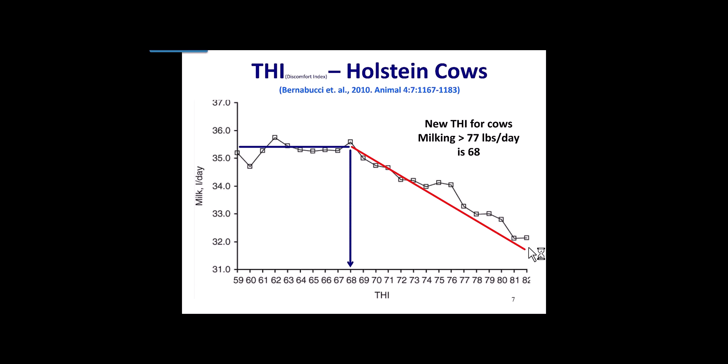And again, this chart, which compares the human THI to cattle THI, the important part here is the cow is much more sensitive to the heat than we are, and we feel it at about 80 degrees Fahrenheit, 40% relative humidity. If we wait for a cow to hit that point, she's already in a moderate heat stress condition, and that means her respiratory rate is above 75, and she's probably lost the equivalent of about 6 pounds of milk. Rectal temperature has gone up.

And so I think charts like this are handy for the purpose of client education to reinforce the importance of the different thresholds and what the parameters are by which we can quantify whether cows are in heat stress, and if they are, to what degree.

So here's a comparison of heat mitigation using a combination of either water and fans or neither. And the first line, the red line, shows that we have no treatments taking place there. If we add fans, and just fans, to that, we see we get a slight reduction over time of the respiratory rate as a surrogate for the heat stress. Again, that's over 90 breaths per minute.

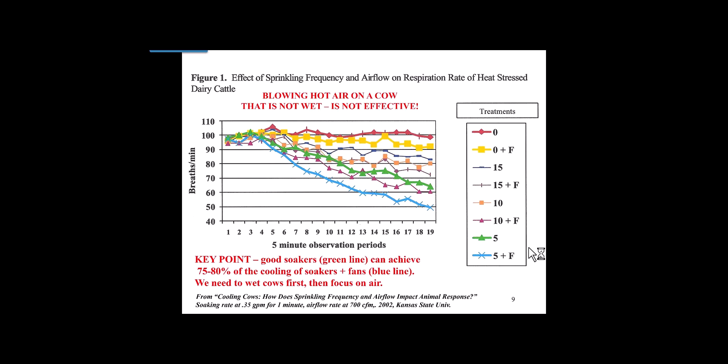And just to review, we know that the cow cools by conduction, convection, and radiation of heat, and those are all based upon gradient. It means she's in contact with solid or fluid surfaces that are cooler than she is, and so the heat moves away from her into those surroundings around her. And then we have evaporation, which initially takes place in her lungs, and again, that's an active process that requires the movement of air across a moist surface, taking the heat away from her to activate the molecules in the water and cause them to evaporate.

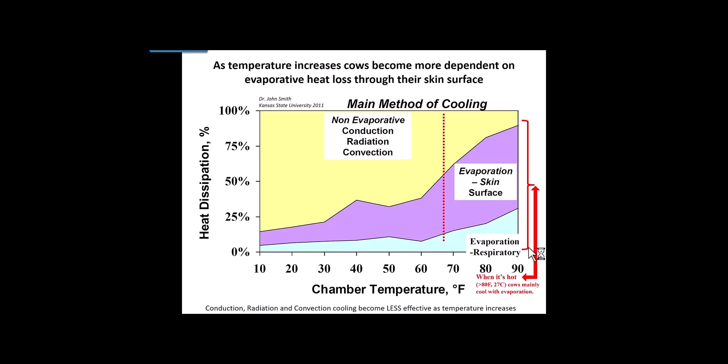So when we look at the impact of those different methods of cooling, as her temperature increases, she becomes more dependent upon evaporation from the skin surface. If we look, respiratory evaporation can account for maybe 25% of heat dissipation under the most extreme conditions. And at the same time, heat dissipation from conduction, radiation, and convection is only about 10 or 15% at those extremes. So that's where evaporation from the skin can be a very critical part of cooling under these extremes, and why it is critical to consider that type of technology to mitigate the heat stress.

So the point, I think, of Jeff's slides, which I'm going to start now, are if you're going to spend money on cow cooling, get it right. There are a lot of ways of spending money for cooling and have a very ineffective outcome. And what Jeff is going to share in these slides that he's generously let me borrow are the systems that are working on real-time dairies in California.

So it starts off with this little spray nozzle. It's called a TFVP 7.5. That doesn't matter as much as the fact that this is what delivers the water to the cow across her back, and this is the dispensing unit that we're going to be looking at to make sure that we get effective coverage on the cow. This green tip nozzle requires a certain flow rate, and if that flow rate is not available, Jeff has alternatives that can be used under different conditions of pressure and flow rate, and I'll show you those.

So again, this is the dairy soaker nozzle that he references, and there's a supplier for those interested. Again, we have no stake in this product. It's just so you know what equipment works.

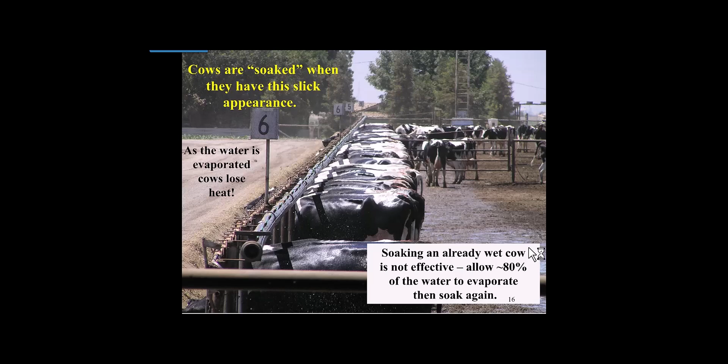Okay, so we want the cow to evaporate 80% of the water that's soaked on there before we start re-soaking her again. That is the optimum for getting the most amount of cooling for the application of the water. So here's a good photo showing you the large droplets in an effective system and the way it arcs across what would be the cow's back.

So you can see in these white cows where the water is soaked through, you can see the pink hide. This is terrific coverage, minimal coverage on the udder because we're not trying to wet the udder. We know the risks associated with that and mastitis. And again, we should be able to effect this type of soaking in about 20 seconds with an effective delivery system.

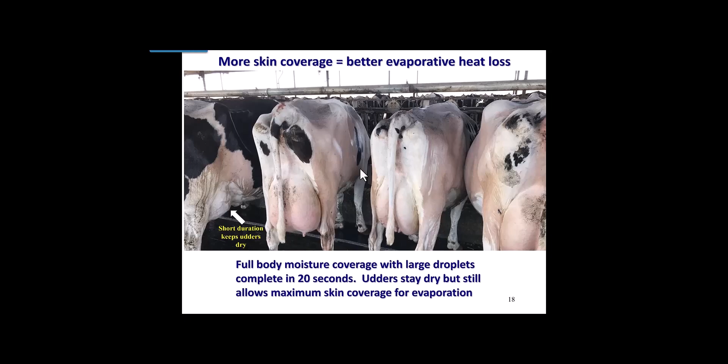Now, here's a less than optimum situation. These girls are getting soaked adequately in the front half, but about 40% of the surface is not getting covered, soaked with water. And that's because the angle of these spray nozzles is set too far down and needs to be brought up to reach across their back. So again, it's not that they're not getting cooled, they're just not getting cooled as effectively and more water is probably going on the ground as a result, which is doing nothing for evaporative cooling.

This is an interesting comparison. If you notice, the soakers that I'm pointing out with the cursor here are only hitting the front end of the cows. At this point, they raised these soakers to reach further across the backs of the cows, and you can see here they're getting full soaking. So this is a system that was undergoing adjustment, okay? So they changed the nozzle angle in order to get full coverage.

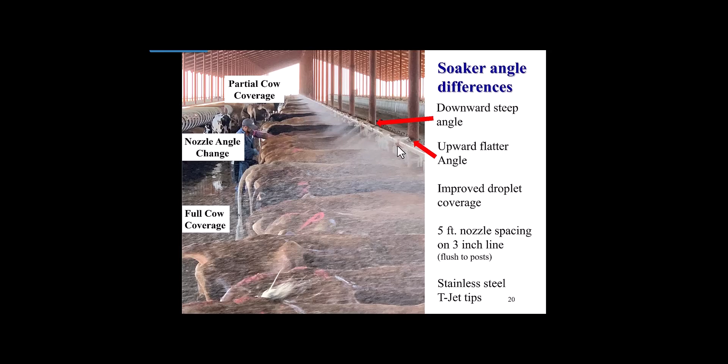And for those techies, these nozzles are spaced about 5 feet apart, and this is on a 3-inch line with those green tip nozzles delivering the spray. Okay, so here's an example again of effective coverage and allowing evaporation to take place before resoaking. Here's the Jerseys that are getting soaked up front, but not past the lumbar region, so we're missing out on an opportunity.

And here's one where, again, those of you who have experienced this know that one of the risks of soaking is to get the feed wet when you get cross breezes and drift of water, and then you get secondary fermentation and spoilage. So this dairy tried to have an inset of the line. They moved it off the neck rail, or the headlock rail, and further back, but by doing so, they basically missed the front end of the cow, and they actually pushed more water past the end of the cow. They overshot. So they understood the concept, just that it needs some refinement. Like this needs to be brought up closer here.

Okay. Given the fact that water is precious in most areas, and we don't want to have any more manure water to deal with than we have to, there are different technologies available now that provide sensors so that the soakers only go on when there are cows there to receive it. And so in this picture, this holding area, you can see that all of these spray nozzles are working. And as the cows in the holding area move forward, they shut off the ones further back, and just the ones where the cows are on.

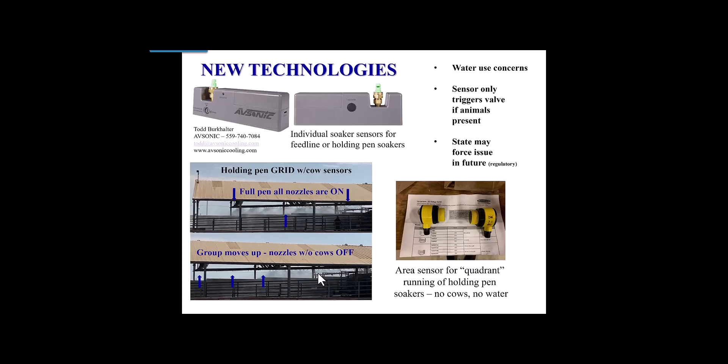So here's an interesting picture. This is a 2-inch line, so it's an undersized line, because if it runs more than 500 feet, 150 meters, it can't hold up for the amount of spray that we want. And you can see between the nozzles there are voids here. Okay, so cows would be missing out on coverage. So this line is undersized for the run. It can't hold up the pressure for that distance at that 2-inch size, 5 centimeters.

The other thing that this is depicting is side-mounted fans, which we now install over the beds, but also to get an angulation onto the cows to get evaporation while they're standing at the headlock. The other thing to notice here is the beds stay dry. We're not doing anything to soak the beds. We're keeping the water in the alley where the cows are and hopefully on their backs. But we definitely need to fix this, either the size of the line, to get more coverage with the current spray nozzles that are on there.

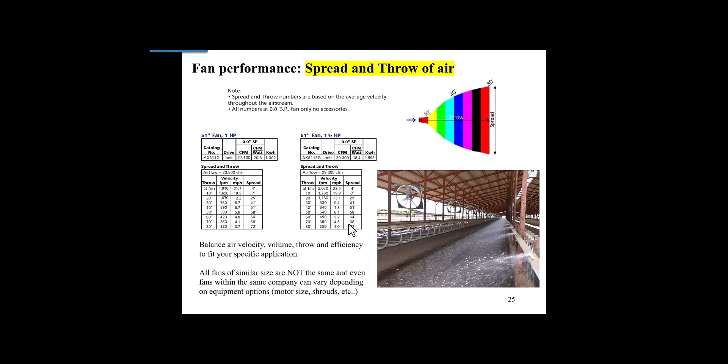The other thing too about fans, and this gets technical and you can read this all you like, but there's 2 considerations when we're picking out fans, and that is the throw, how far it will project the airflow, and how wide that flow will be at that point, because we do want a minimum amount of airflow, and otherwise we're not going to get the effective evaporation. And again, we're only going to get cooling if we move enough air to get the evaporation. And so sizing the fan is critical, and not all fans with the same specifications perform equally.

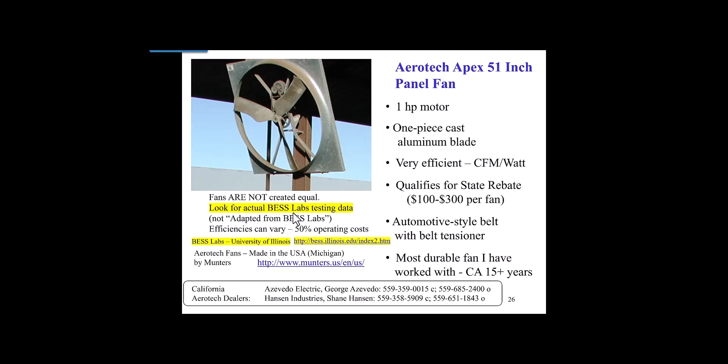And so an unbiased source of information on this is BESS Labs, which is run by the University of Illinois, where they do a comparison of different fans to tell you how effective they were. And the ones in these pictures were Aerotech 51-inch panel fans. And again, just saying this is what's worked for them over the years. I'm sure there are other good ones out there. I'm just sharing what we know.

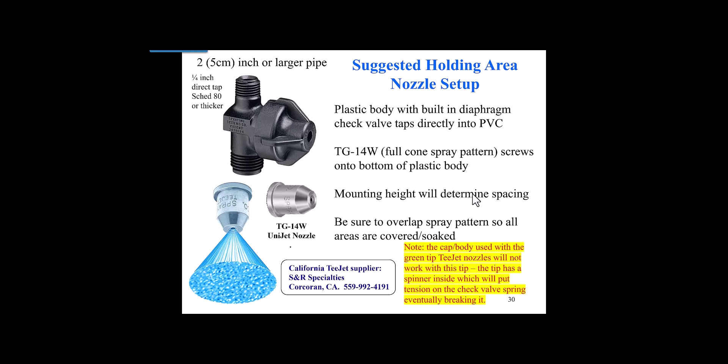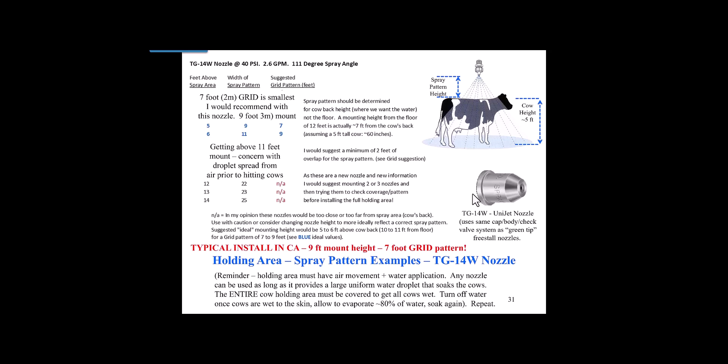The other part of this worth considering is we have to understand the spray pattern height, the height of the cow, how wide an area of coverage we're going to get, so that we get overlapping of cows from one nozzle. And all of these things depend upon the installation and the specifics of the holding area. But typical mount height in the U.S. is 9 feet, so 3 meters metric, and in a 7-foot grid pattern, so 2-meter grid pattern.

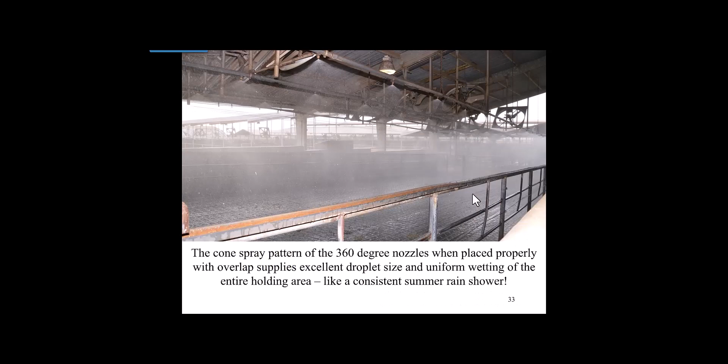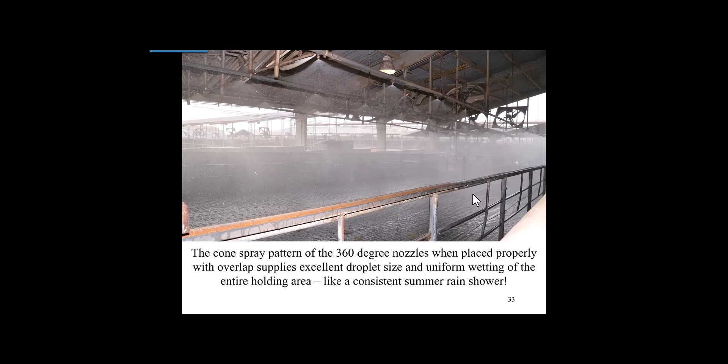And again, these are other valves that are used in the holding areas to affect good coverage. And that's what it looks like. It's a perfect rainstorm. You have 360-degree nozzles with overlapping supplies of droplets, and you have a uniform wetting of the entire holding area. And that's what it would look like with the cows.

Now, here's a situation where they put in lots of fans but no water. And sorry about that. When you have this type of setup, moving the air is going to give you convection cooling, but you don't get any evaporation. And while convection with cool air can be beneficial, with the ambient warm air, it's better than nothing. But compared to evaporation, evaporation is 22.6 times more effective at cooling cows.

The other thing to look at too is radiant heat that comes down either through clear panels or infrared that comes through the panels that absorb heat of the sun and allow it to transfer down to the cows. Okay, those are highly effective sources of heat stress to the cattle.

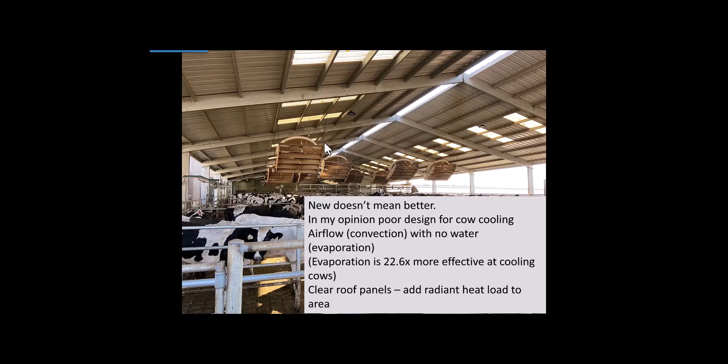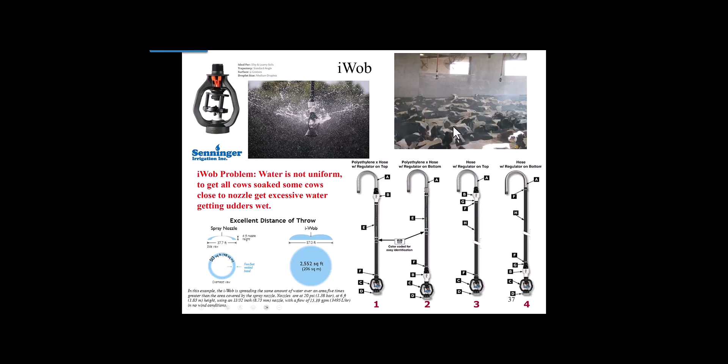So in summary, for evaporative cooling, we want to soak the surface as quickly as possible, large water droplets, get it done in 20 to 30 seconds. We want to make sure the surface area of exposure is covered completely, meaning the top. Because the more skin that's wet each cycle, the better cooling we're going to affect. We want increased airflow, whether that's natural or mechanical, to affect the evaporation. And obviously, the lower the humidity, the better off we are. Can't always control that. But the point being, if you maximize the number of wet-dry cycles per hour, you're going to mitigate the greatest amount of heat stress.

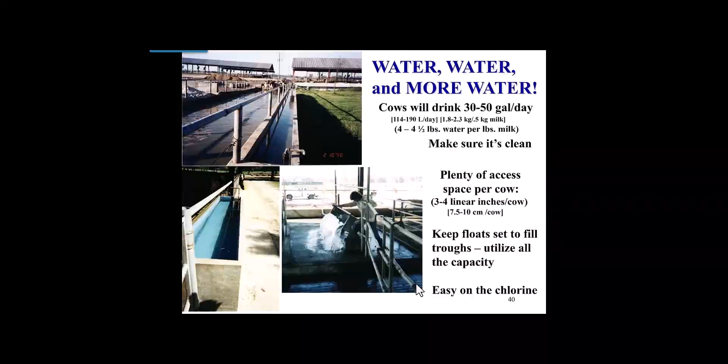Cement troughs are good, but they're a little more of a challenge to keep them fresh because the surface gets rough and pitted. So as long as they're kept clean and possibly chlorinated, if you can make that work, that's fine. If it's a V trough, as many of them are, then the volume is compromised, and so you want to make sure that you maximize the fill and that the float is set so that it keeps it full, because once they start drinking it down, the water supply drops off very quickly.

So these are the simple adaptations that we've seen that have made the biggest improvement. Is return lane water. We supply 2 linear feet per cow returning from the parlor. This is just PVC that's been cut, and it's a very simple and easy option to install. So this is a double 30 parlor. So for those 30 cows coming out, we need 60 feet or 18 meters of linear water space to allow all cows to drink.

And again, no surprise, they're very thirsty physiologically speaking after being milked. So having this available to them improves dry matter intake by consumption of water. And don't forget, unless the water is especially warm, which it is not likely to be, you're getting internal cooling by conduction as the cool water comes in and pulls heat from surrounding tissues that are warm.

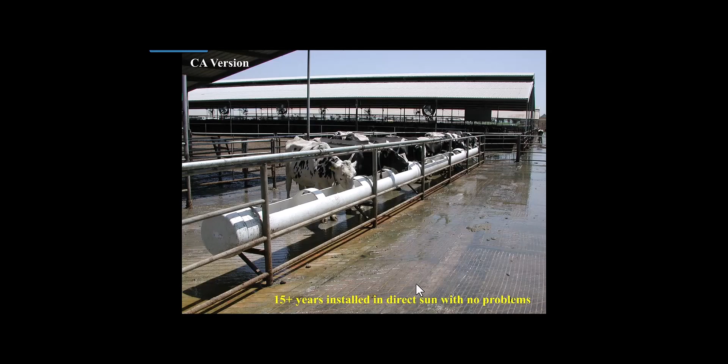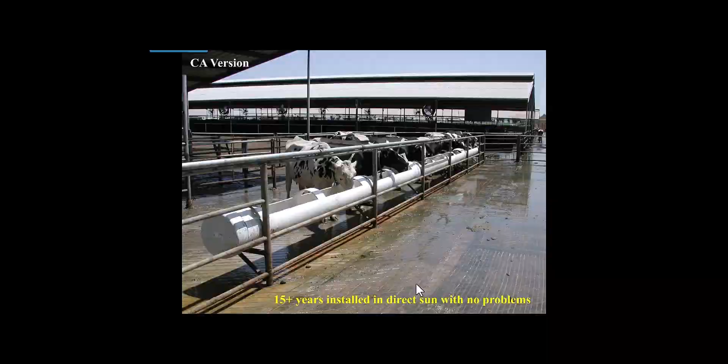Here's a 15-year-old installation just to demonstrate that it stood the test of time. And again, a very simple, cost-effective approach. And you can see how clean the water is there.

So this is a setup where they put the water trough, additional troughs, both on the entry and the exit. On the entry side, it doesn't really cause a traffic jam because the cows are usually not that thirsty on the way in, but it doesn't hurt to have it for those that want to stop and take a drink. The exit side is where you're going to get the majority of your takers, okay? And it's critical that we have these set up at the proper height to accommodate them for easily drinking without getting any contamination from surrounding splatter of manure and such.

Now here is a large diameter PVC pipe, but you notice they've relieved all the surface, and if you don't leave some reinforcement ribs across the top, you're more likely to have problems with breakage.

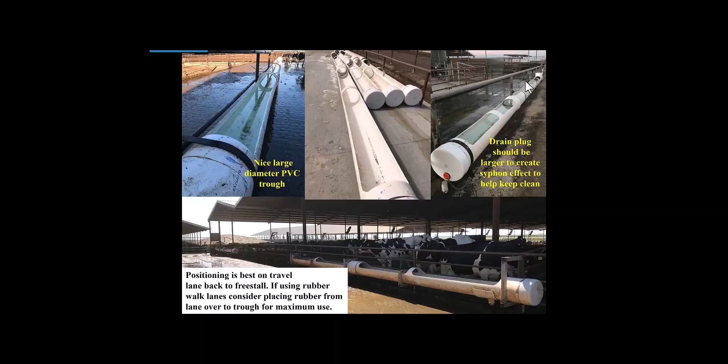Okay, so regarding cow cooling, some of the watchouts. Make sure the water lines are not undersized, because these variable flow nozzles will result in inadequate pressure flare-outs, and you won't get good coverage. Nozzle spacing that's too far apart is also an issue. So, again, 1.5 meters typical nozzle spacing, 5 feet on a 3-inch line provides good overlap of coverage.

Water that's on too long, once the cow is slick, obviously it's just a waste of water. You're not getting any more benefit to justify the use of the water. Fans for airflow with no water don't tend to be as effective as those that are used for evaporative cooling. So the use of fans for evaporation are critical. Must have fans together with water in the holding area, especially with the stocking densities that we have, or will create too much humidity from the water alone. Holding areas, we want to make sure we're moving the air away from the parlor.

Some dairies install the soaker lines off of water trough lines for convenience. The problem with that is it'll rob the troughs of water, and the recycle time on the troughs will go up, and so the cows won't get the water they want to drink. And in the center picture down here, if my mouse will work, here we are, you notice that there's a lot of elbows in this connection, and every elbow that's added to connect one line to another, especially if it drops from 2 inches to 1 inch back to 2 inch. When we put elbows like that in, we're effectively adding about 100 foot of distance in terms of pressure loss. And so that's something we want to avoid, elbows at all cost.

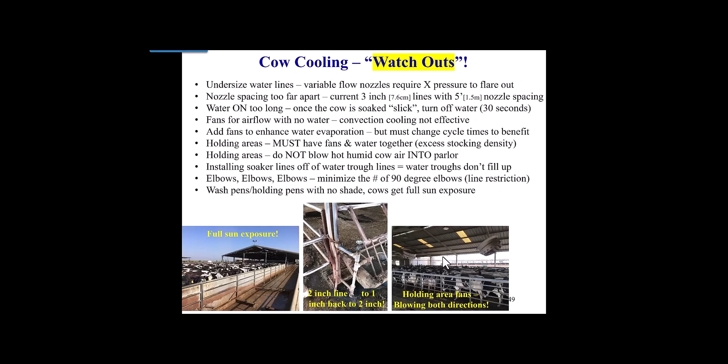Okay, so keeping cows cool in California, heat abatement. They use shade, they soak, and they move air. Very simple, okay? And maximize wet-dry cycles per hour. In terms of water, I can't say enough about it, not just from the thirst side, but also from the perspective of internal cooling when they drink that cooler water. Now, if your water is 70, 80 degrees, then obviously you're not going to get the benefits you will if you get water coming out of the ground at 40 or 50 degrees, and that depends upon your location. We want to minimize heat gain and maximize heat loss.

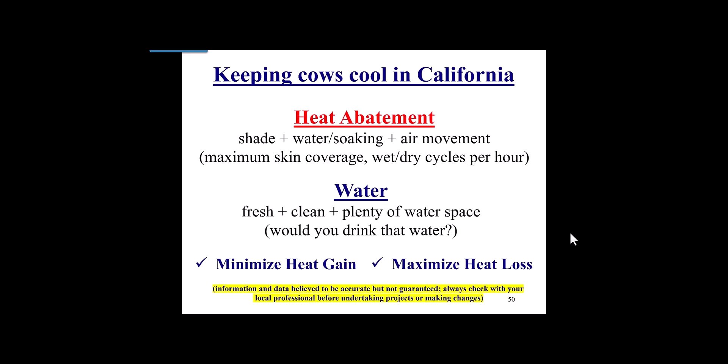And Jeff has a disclaimer there. This works for him, but check with your local professional before implementing other systems. And his contact information there, and he welcomes any people with questions. Again, Jeff's been doing this. Jeff and I have known each other now for over 20 years, and in his sphere of influence, he does a tremendous job of helping his clients affect good cow comfort by mitigating heat stress with effective cow cooling.

Now, what I want to talk about is heat stress and its effects on the cow through leaky gut and subsequent inflammation. Now, I'm just going to hit on some current research to challenge the way we think about certain things, and I believe there'll be speakers coming forward that I reference in the credits of the researchers that will give you a lot more specifics, but from a practical side, something I want to share.

So let's start with this gentleman. All disease begins in the gut. Hippocrates said that 400 BC. He considered the gut to be the root cause of a lot of diseases. I think that's a fascinating observation. If you consider the exposure of the animal to the environment, the cow's skin, external surface, is about 7 square meters. Her internal surface exposed to the environment, her gut, is almost 2,800 square meters. So just consider, okay, the challenge risks presented to both of those areas.

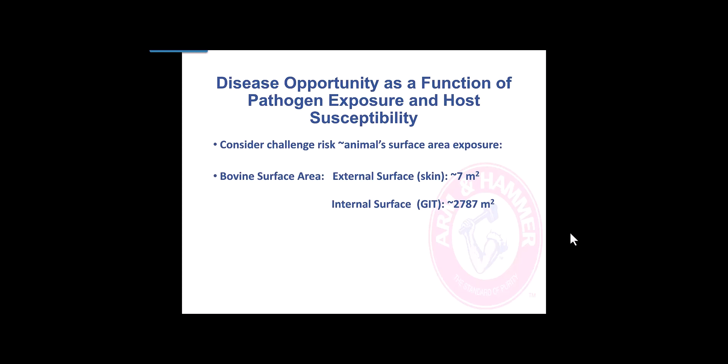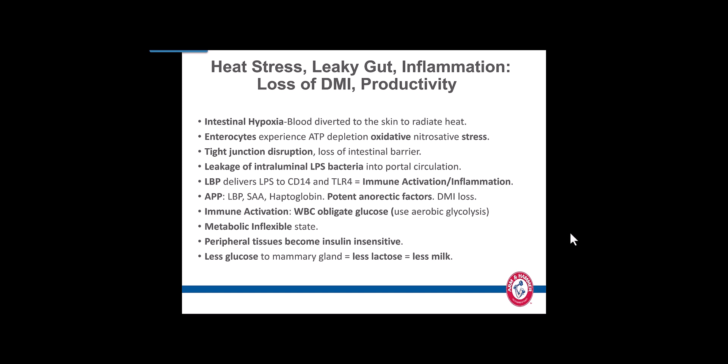So here's a depiction of this. The LPS bacteria are able to penetrate through the enterocytes or between the enterocytes, go into the portal circulation. They're picked up by LBP, which is great. And that delivers them to the immune system, and we mount an inflammatory response with those acute phase proteins, which, as I said, end up causing dry matter intake to drop.

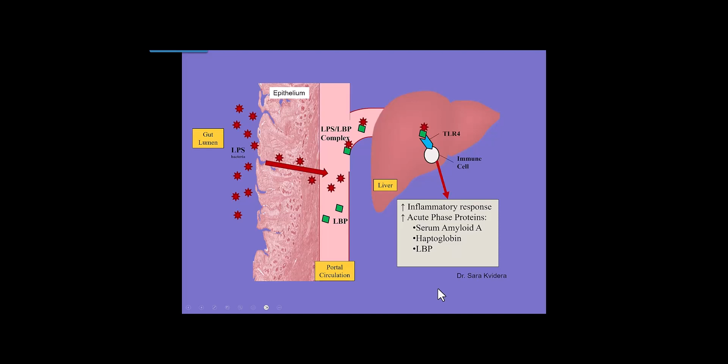So there are a lot of stress factors proven to promote leaky gut. We're talking about heat stress because it's that time of year, but overcrowding, excessive pen moves, dietary changes, imbalances, SARA or full-blown rumen acidosis, all are incriminated in leaky gut. So is limit feeding that leads to slug feeding, and even poor pen hygiene, where we increase the bacterial challenge not only to the gut, but to the udder and to the reproductive tract. And so this emphasizes the importance of reducing stress in order to improve and optimize animal well-being.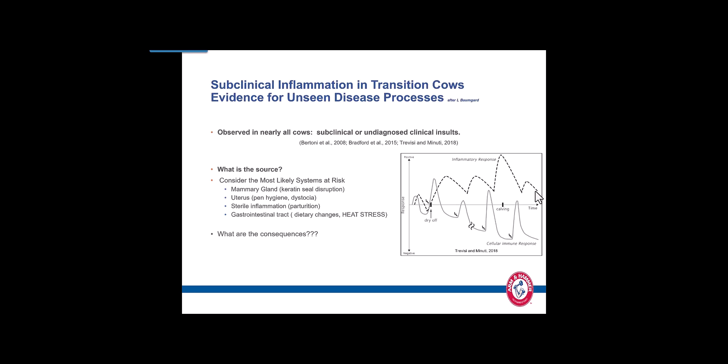Now, the comment is they didn't show any signs of stress, they didn't show any signs of illness. And that's true, because in most cases, the inflammation that's taking place is subclinical. And as shown here by Trevisi and Minuti, they did some work on normal transition cows, and they observed these spikes in inflammatory markers, even though these cows did not present with any clinical disease. The point is, as with other entities that the cow deals with, subclinical is our biggest challenge because we don't see it. She plays poker too well and she bluffs us into thinking she's fine. But we know they're there based upon the blood markers that are going up.

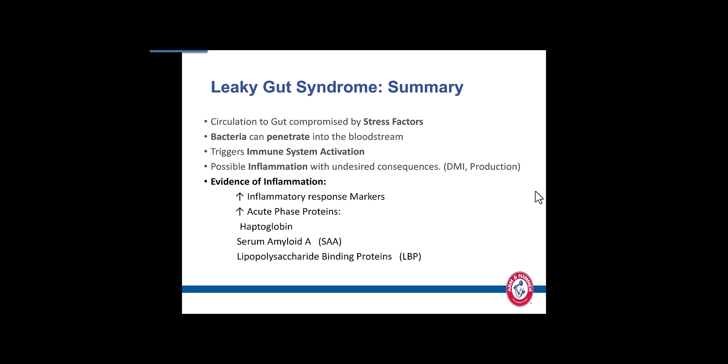So we know the gut is compromised by stress factors, and the bacteria penetrate, and it triggers immune system activation, and we get inflammation. And we have evidence of that by these markers that I just pointed out, haptoglobin, SAA, and lipopolysaccharide binding proteins. What's interesting is the decrease in milk production is not completely accounted for by the decrease in dry matter intake.

And so if we look at an inflammatory response, and I'll go through this. Once LPS gets into the system, we know that glucose is going to be diverted away from the mammary gland, and that's because the white blood cells require it as an obligate glucose user. And we get reduced dry matter intake. We're going to get all sorts of unhealthy fat mobilization as she tries to mobilize fat to provide the energy needed for other tissues from which the glucose has been taken.

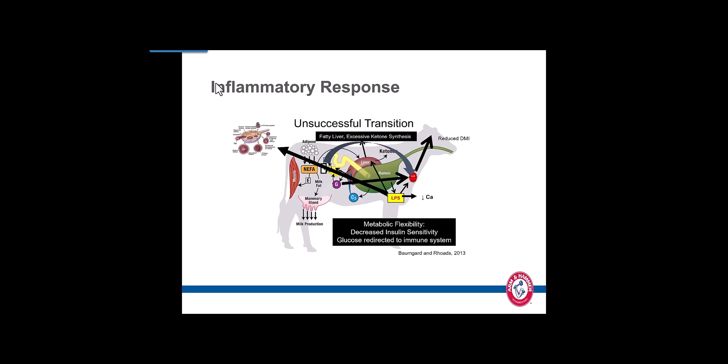And we also know that there's a negative impact on developing follicle fertility for subsequent breedings, future breedings. So all this cascade is taking place as a result of inflammatory activation. And so you ask the question: the host is challenged by a potential pathogen via some opportunistic stress. Immune system is activated and inflammatory response ensues.

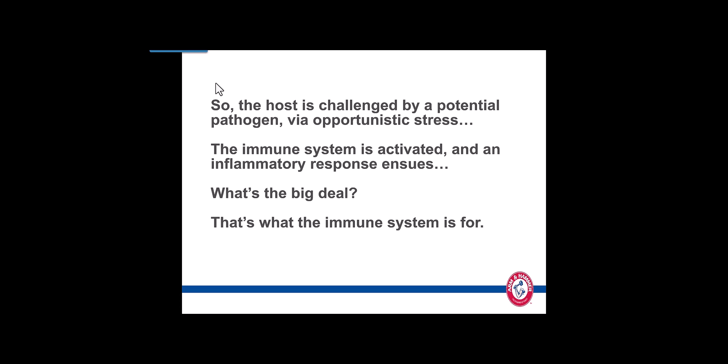Okay, so what's the big deal? That's what our immune system is for. Well, when we have this immune system activation, there's an energy cost. We know milk volume is driven by glucose to lactose. Activated immune cells, as we said, require glucose.

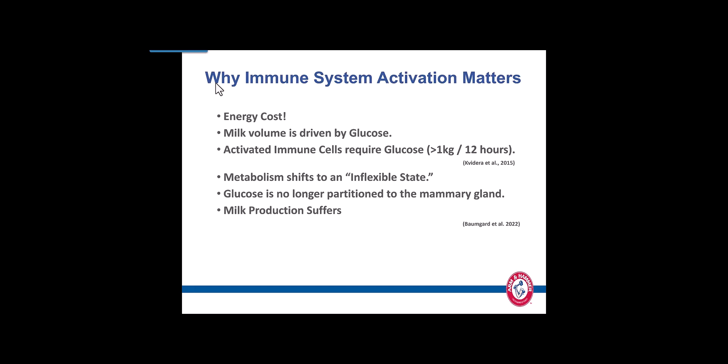And one study done in Lance's lab, Iowa State, where they used a euglycemic clamp, they demonstrated that a full-blown inflammatory crisis with immune activation costs a kilogram of glucose every 12 hours, okay? And as I said earlier, glucose is no longer partitioned to the mammary gland because it's being used by the immune system, all right, and production suffers. So 1,000 grams of sugar every 12 hours.

So consider that 72 grams of that sugar is required for a kilogram of milk. Therefore, out of that 1,000, we're going to lose about 14 plus kilograms of milk in that 12 hours. Now, that probably is a clinical response. In other words, a coliform mastitis, I believe, is what they emulated to produce that glucose deficit. But it would be the equivalent of a normal LPS challenge.

But what about all these subclinical inflammatory responses that are not clinical, but still have inflammatory responses and activation of the immune system at some level? We're still using glucose diverted from other productive tissues to affect this response. And so, if it was 20% of a full response, it would still be 200 grams of glucose, and that could be 3 kilograms of milk loss.

And so those cows that Trevisi and Minuti showed you with all those inflammatory spikes didn't show illness, but they were still consuming glucose, diverting glucose away, say, from feeding that fetus, which we know requires glucose or amino acids after 190 days gestation for the exponential growth that it's undergoing.

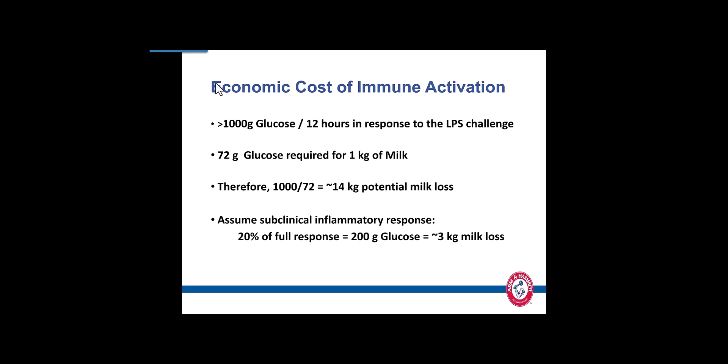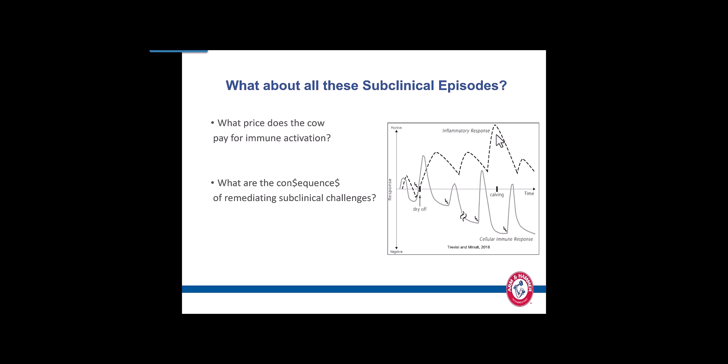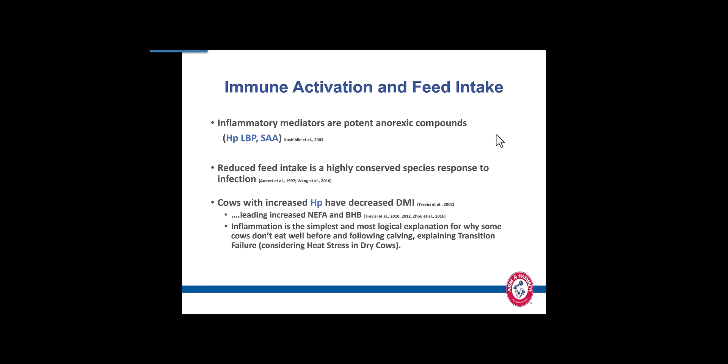So we have to consider the costs at all metabolic levels of these insults, starting with heat stress. There again there are these inflammatory responses. So, just because we don't realize they're there doesn't mean it isn't happening. And again, just to reinforce, these immune activation mediators, the inflammatory mediators, cause reduction in dry matter intake, and that's been proven across numerous studies, and the references are there.

Okay, so what if we could help mitigate heat stress from the inside out? If we had a technology that could reduce leaky gut by reducing host susceptibility through improved gut health, or maybe by reducing the pathogen challenge in the gut, and thereby reduce the subclinical immune activation and inflammation.

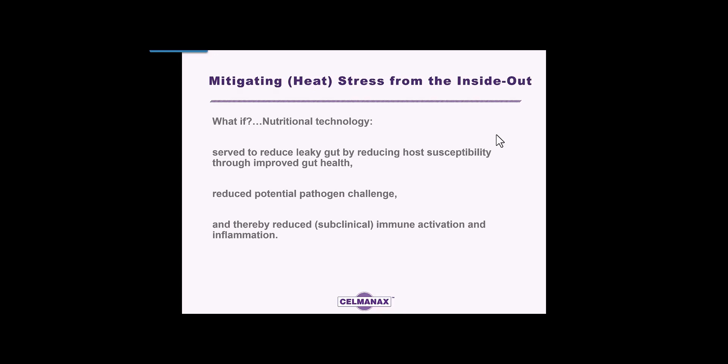The technology is called refined functional carbohydrates, which basically is yeast cell wall split up into its active ingredients. The mannose that supports the growth of bacteria like lactobacillus and bifidobacterium, the MOS that serves to bind bacteria like E. coli and salmonella, the beta-glucans that can support the immune system and help maintain the integrity of the tight junction, reduce cytotoxic damage, and the other effects that they can have on reducing protozoal impact from crypto and Eimeria. So these RFCs are produced by enzymatic fractionation of the yeast cell wall into the active ingredients.

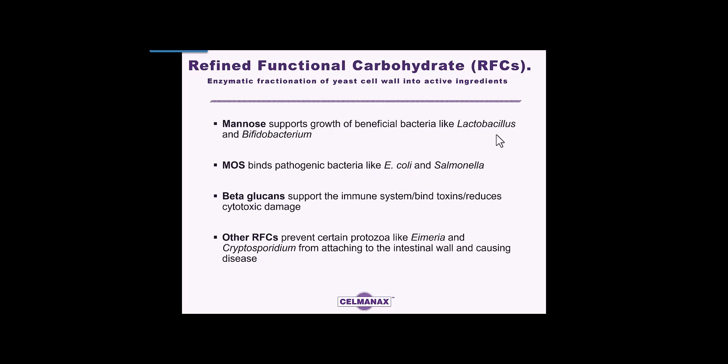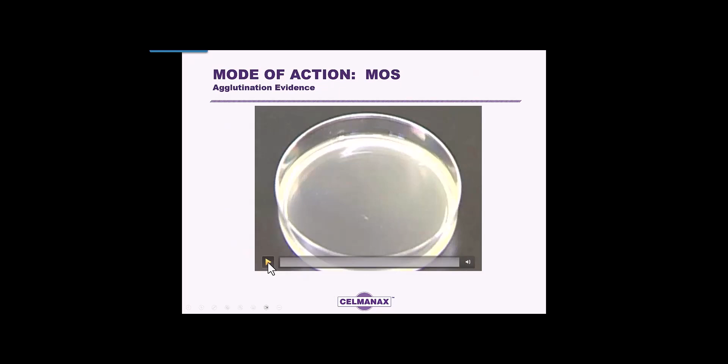And here's an actual representation of what this looks like, just to show you, because I wasn't a believer until I saw this. That is an RFC liquid known as Celmanax being added to a plate of E. coli.

And as I said earlier, the MOS serve to help agglutinate and bind the bacteria so they cannot preferentially bind to the gut. And as we see, after a few seconds of this being stirred around, the agglutination of the E. coli starts to take place. And that's one of the beneficial effects, because that reduces the challenge in the face of a leaky gut.

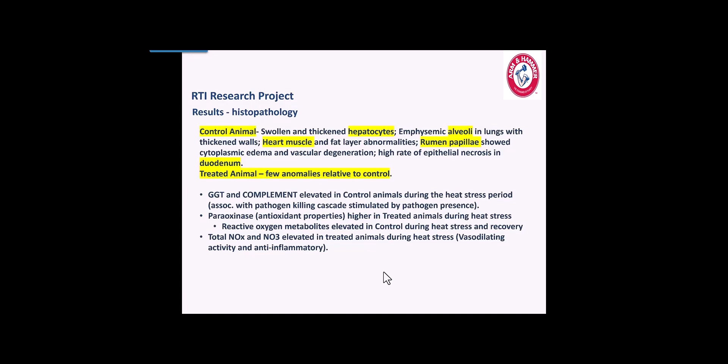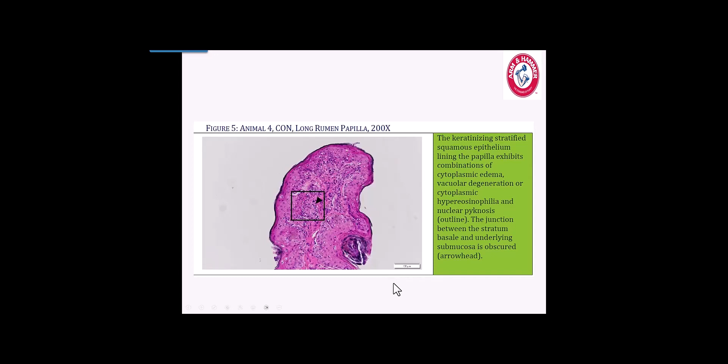So here is a control cow and the architecture of the rumen papilla. As you can see the description there, but basically the cells are pycnotic, meaning they're undergoing death here, and the architecture is very disrupted. Now here is a treated cow, and you can see that this architecture is much more intact. This is the rumen papilla. It's healthy. There's nothing wrong with this.

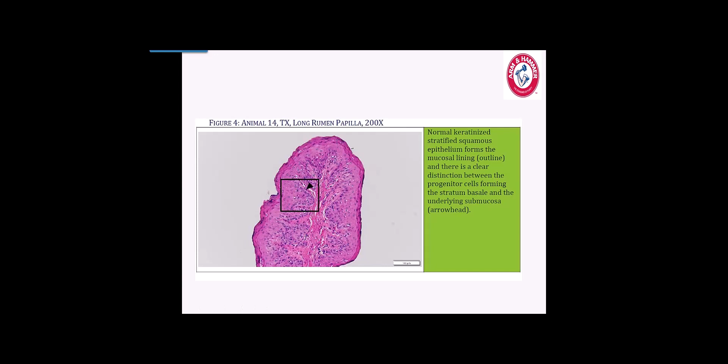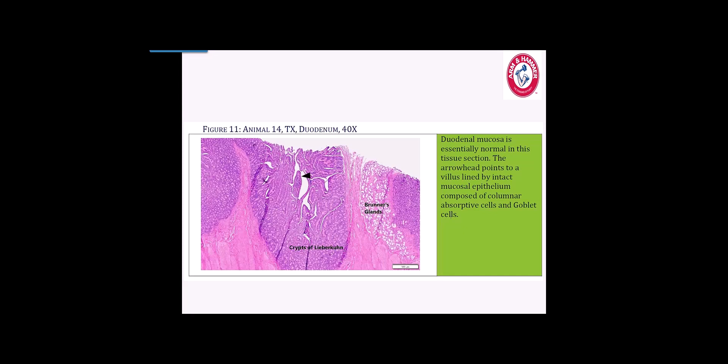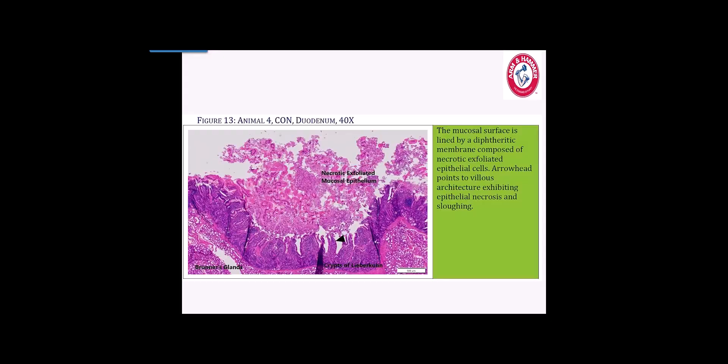So, in consideration of all the stressors common to dairies, can we eliminate stress? Well, good management, housing, good husbandry practices will mitigate or reduce the effects of stress, but recognize there's always going to be some stresses, perhaps beneficial, such as those during parturition, but transportation, environmental stresses, certainly we can mitigate, okay, through better management practices. We will never eliminate all of them. And again, our goal here is to have an effective microclimate management for heat stress abatement of the cow.

As this example shows, advanced feed technologies can be used to protect the entire gut and prevent pathogen load, protect the intestinal cells from damage by pathogens and mycotoxins, and actually help the immune system be aware of the need for activation. Because what we're trying to achieve is an edification of the gut to make it more resilient to the challenges, okay, so that it doesn't experience any more inflammatory response and the metabolic consequences. And I think mitigating heat stress from the inside is an opportunity that we all have to consider with the technologies that are available.

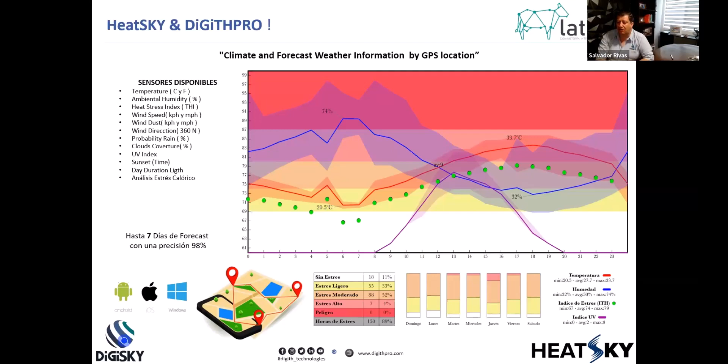But Martin, Dr. Traxler, is using our heat stress reporter. It's the same technology, and it provides him the accuracy of the THI, as you can see now on your screen. This is how the graphs are generated. He has accurate data on the heat stress for the following 7 days, with accuracy through GPS locations; they call it geolocalization high-accuracy data, which is the way weather forecast companies sell the data. With this technology and data, Dr. Martin and his team at Lattech are able to make proper decisions and adjustments on diets and everything he does with this data.

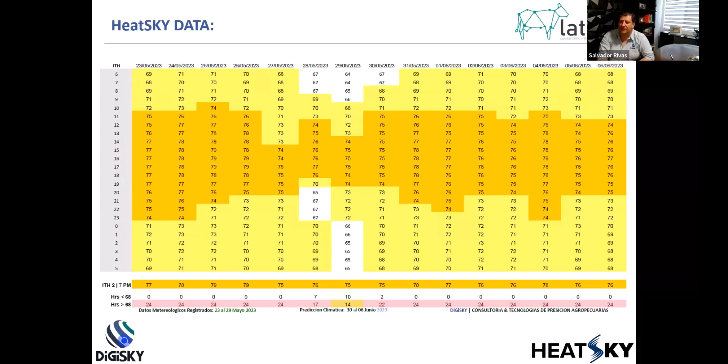You don't need any electronics to add this technology. You only send us the GPS location of the farm you need, and in less than 15 minutes you have all the forecasts daily if you need it, or maybe once a week. With this, you can decide how to face heat stress. The other interesting thing is that you can take all this data and put it in a yearly graph, showing how the heat stress was on that particular farm. And you can make a footprint, or a thumbprint, so you know the usual monthly heat stress you will have in each of your dairies.

This is powerful data, because now you know the stress you need to fight for each of your customers individually. This will give you better decisions, data, and numbers, and the results will be absolutely stunning. This is also the last graph. It's a comparison of what you can do with all this data when you put it in a monthly chart and compare 2 or 3 years of data. That is what Martin does.

He took the data from his farms and made an analysis of what is going on with his data and what is the heat stress that he needs to face. So that's what I have for you. The technology is called HeatSKY, and it's available worldwide. And well, I don't know if Dr. Martin will also say something about this technology.

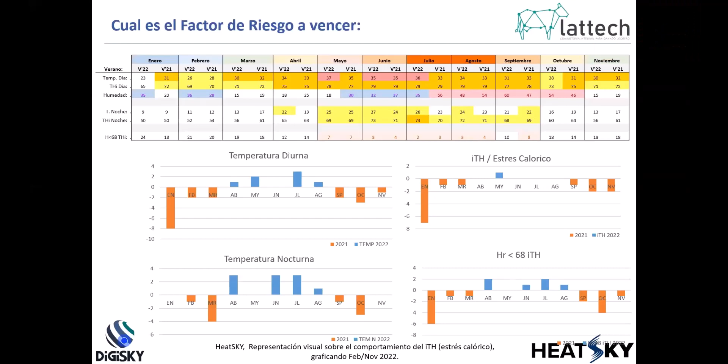Sure. Salvador, if you can go back 1 or 2 slides. Yes, please. Yeah, give me a second. Okay. Okay. Give me a second. Something happened with the PowerPoint.

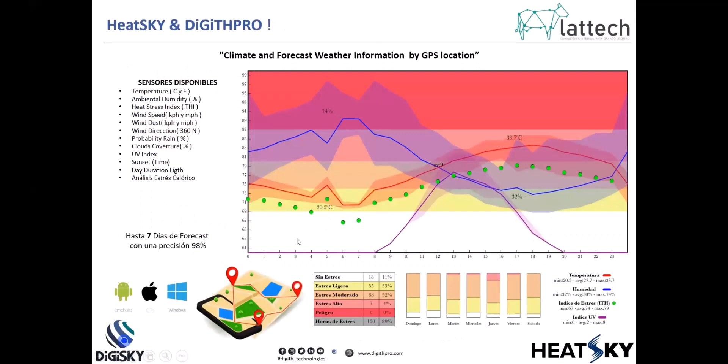Sorry. I just wanted to mention that in that slide with all the different hours of the day, I think there were 15 days on that graph. There were different THI numbers being predicted for different hours during the day, and we use that information to decide when cows should be brought into the cooling area. Which one? This one or this one? That one there.

Okay. So the different colors represent different severity of heat stress for each hour of the day. So if you look on the left-hand side, it's starting at 6 a.m. in the morning, and down at the bottom is 5 a.m. in the morning. So this gives us an idea of when the cows might be experiencing heat stress and when they need to be cooled, or when we should concentrate on cooling them.

You can see here in Mexico, well, it's in our region here, we basically have 24 hours of heat stress now, with anywhere from 8 to 9 to 10 hours of severe heat stress. So this can be a very powerful tool to help us design cooling programs.

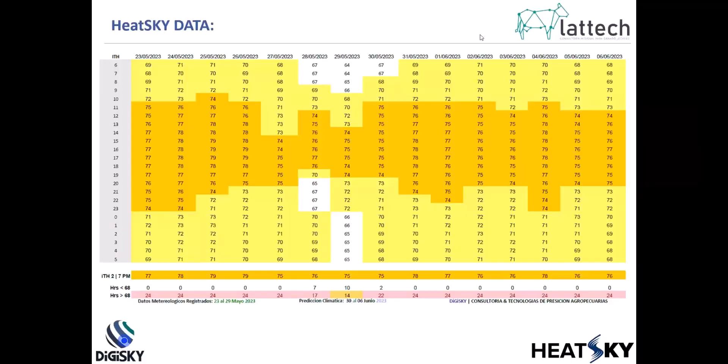Thank you, Marty and Salvador. That seems like a very interesting and useful program. When Tom did his talk last month, some of the data that he had was very, very interesting. So integrating this into the program and being able to incorporate the information that you have might be really interesting. Tom's with us. Bill, you both have worked in areas with the same sort of severe heat stress that Marty and Salvador experience in Mexico. What are your thoughts?

So I think anytime that we can use data proactively, convert it to knowledge, so we can be more effective at mitigating the stress before it actually does damage on the cattle, they certainly win, and we win as a result, because it's all part of our understanding of animal well-being, how we can create a microenvironment that protects them from the ambient impacts. So, I appreciate the technology here. It seems very useful.

All right. Well, thank you very much. I guess I'll start off our question round. I'll begin with Elena. We haven't heard from you in so long. Do you have any questions for Bill? I can't resist actually. So Bill, thank you for the presentation. Very interesting, and actually it will be very useful for the next period.

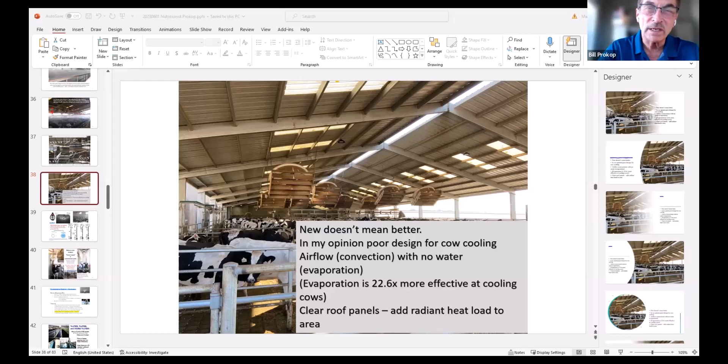And there's still a lot metabolically that we can't, I'll use the word justify, what the cow does and why, whether it's in terms of partitioning of nutrients like glucose or BHBs or whatever. But I really think this is the next frontier as veterinarians, as nutritionists, that we're all going to deal with as the two disciplines really become integrated together. Okay. And so nutrition and medicine.

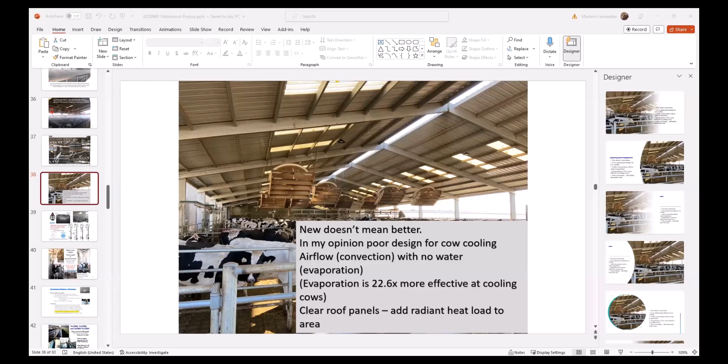Uh-oh. You turned Marianne's audio off. Yay! Salvador, you're our hero. Fine. That's a picture. You can do these now, Tom, from now on.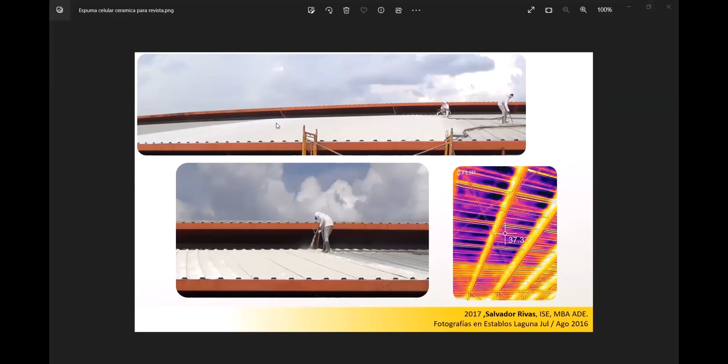You know, in the ideal world to apply something like this. I'm thinking about other areas where we might want to use it, but the window of application may be constrained by the environmental influences. That's all. But certainly worth looking at. Very cool. Thank you. Thanks, Salvador. Look forward to hearing more.

So I'm going to change my share and then ask you if you would give us a little talk on your product. So let's go there. I think I need to get to the beginning. All right, I think we're ready. Okay, thank you very much.

I am Salvador Rivas. I am founder and CEO of DigiSky Technologies in Mexico. And I am working very closely with the Latte team, with Dr. Martin Traxler and all that they are doing here in Mexico. First slide, please. First of all, I would like to talk about the THI, or heat stress. I know that everyone here in the room knows what it is.

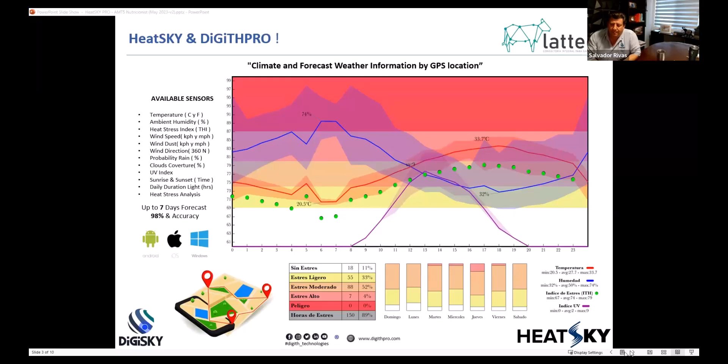And if we can see the next slide, please. Okay, this is commonly how the system gives you the data. You will see here that this is 15 days of data. You are in the middle. For example, this data was taken on the 30th of May, 2 days ago. And we have 7 days previously, and we have the next 7 days that we will face. And what we can see is that we will have 24 hours of heat stress here in Mexico, in La Laguna, Torreón, Región Lagunera.

And the moderate stress will start between 10 a.m. to 11 a.m. and it will finish between 9 or 10 p.m. So this is your critical area where you need to be sure that you will provide enough cooling and the proper management in your farms. And in this place that is light stress, okay, it will have light stress, but the cow can face the light stress with water or with wind or something. This is what we try to get.

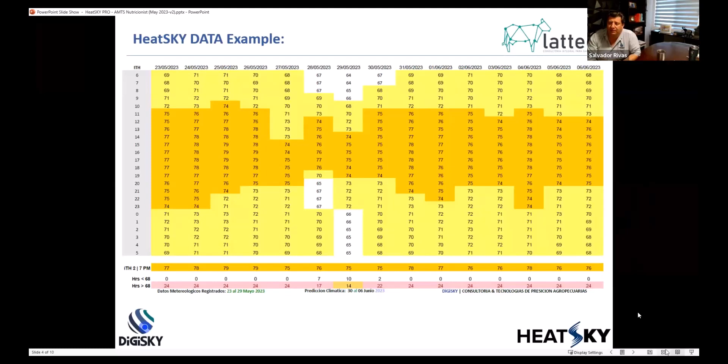Please, the next slide. With all this data, this is an example of the report that you get. This technology that we are speaking about is a system that gives you the data. So if any of you want to see the weather or the forecast from a THI or heat stress point of view, you only need to send us the GPS position of your farm, and automatically we will start making all the data from that GPS point. And you will have this data every day or every week as you prefer. You will have temperature, humidity, THI, the average of clouds that you will have on those days, the UV index, and also a graph of all this data.

The important thing of all this is what you do with all this data. And if we can see the next slide, this is an example of how the graphical data comes from the report. And you can see here easily the same bands that we discussed a little bit before: no stress, light stress, moderate, high, or dangerous stress. These are the 24 hours of the THI. The red line is the temperature, and this is the humidity that you will face during the day. So we can see that, for example, here in Torreón, we have humidity in the morning. And in the afternoon the humidity drops dramatically, but the temperature rises. And this combination gives you heat stress levels up to moderate and into the high level of heat stress.

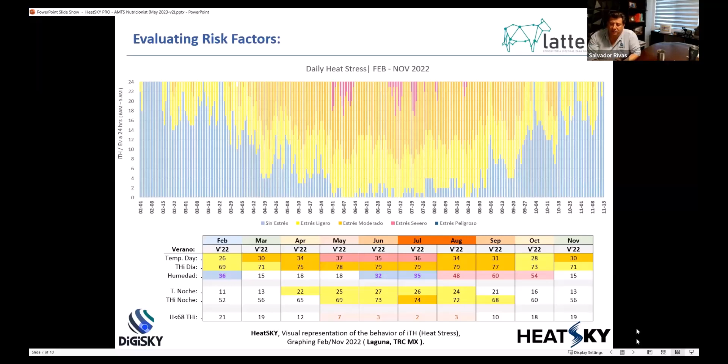At least this is what was going on the previous year. And with this, we have all this statistical data that can help your nutritionist or all the team that you have in the farm, so you can take decisions about how to calibrate your diet or something like that. Please go to the next one.

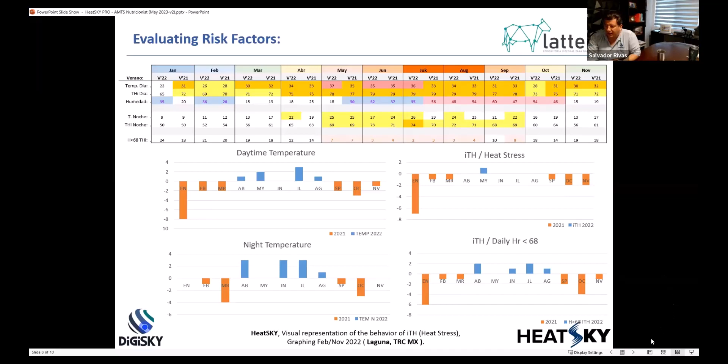And also we have the ability to compare 2 years or 3 years if you wanted to. So I think it's a powerful tool. If you have the data, you can take the right decisions and make the proper statistics. And in the final slide, well, we were discussing a little bit about this technology also.

It's a thermal insulation foam that goes on the metal shades that you have in the farm. This attaches perfectly to the metal shades and provides perfect thermal insulation. As you can see here, before the installation, or in the place with no installation, we have 72.4 Celsius degrees in a usual August summer here in Mexico.

But look what happened when you add the thermal solution. It goes to the normal temperature that we have here, that is 37 to 40 degrees in the summer. So I think it's a powerful tool. We were talking about this and how this can help you also to reduce the heat stress inside the barns, in the farms, or even on the hutches with the cattle. And I think this is the last slide that we have here.

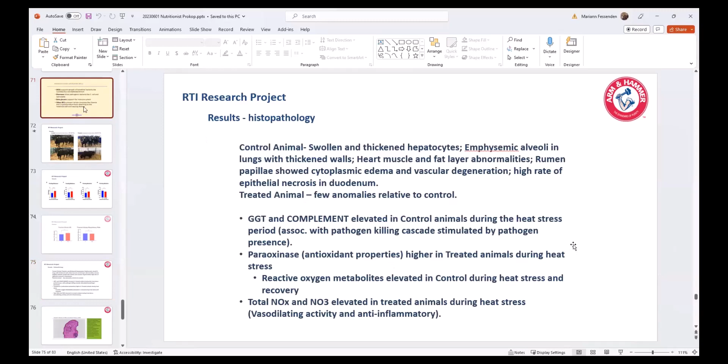And are some of these ingredients naturally available or occurring in feeds? In some feeds? Well, it's a yeast cell wall derivative. So to the extent that there might be yeast there, basically you're taking in a yeast cell and fractionating it with enzymes into its active ingredients, or what we call its active ingredients for protecting the gastrointestinal tract.

So the problem with intact yeast is that you don't necessarily get the activity of the specific moieties, because the yeast cell tends to stay intact for the most part, unless you do something to cause it to dissociate. And this is done enzymatically in this particular product to increase the potency, if you will, of the activity. Okay. All right.

Is there any panelist type discussion that you want to have happen? There are no more questions in Argentina, and I have no more questions here. Does anybody have any comments or thoughts they want to share before we end this?

Let me say something. Folks, this is not just an issue about cooling the lactating cows. Do the dry cows, consider the close-up cows. They are equally, if not more important than the lactating cows. Now you can go, Marty. Okay, I agree with that statement. And there's probably something coming up later on in the year to talk about that from the Florida group. Yes, Jeff is speaking in August.

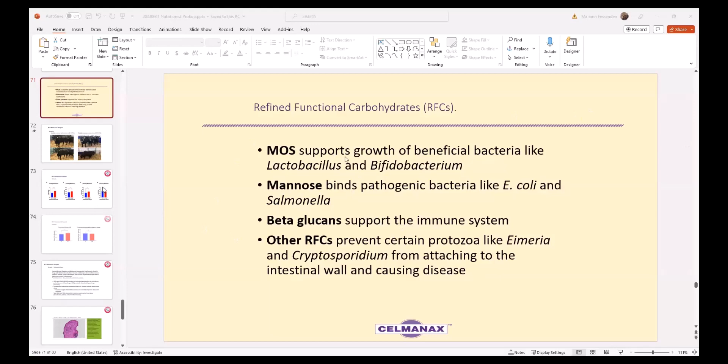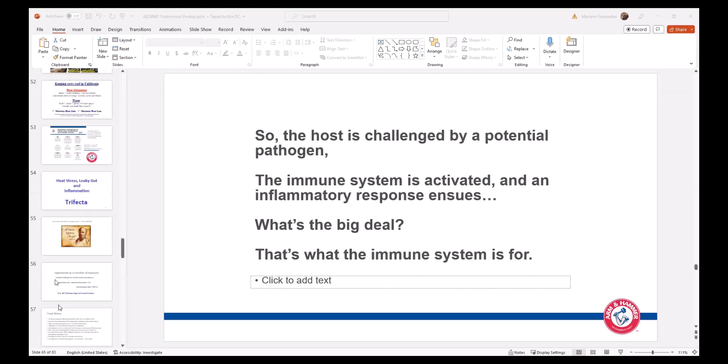But Marianne, if you go back, I don't know how many slides, but to Tom's point, and I'll bring this up again, the work that Trevisi, Minuti, Bertoni did in Italy. Keep going. There. Oh, no. Slide 60. Okay. 60. You're going the wrong way. No, I'm not. There's a lag. 60 on yours or 60 on mine? There we go. That's it.

But the point is, this is not just for the lactating cow, which we focus on because she's the only one that's producing anything, right? This is happening to the entire herd. And what you will hear from Lance, I'll give you a preview as to why you want to dial in.

Fresh cows, the problems that we see in fresh cows are probably typically assigned to a hypocalcemic situation. And there's no statistical cause and effect ever demonstrated about that. Hypocalcemia as a gateway disease, certainly it can be associated with things, but what's more compelling is the fact that when they start looking at true fresh cow diseases, the cows that undergo metabolic challenges in the fresh window have had an inflammatory response days, if not weeks prior to that lead up to this fresh cow crisis.

So the true cause of a lot of these, the root cause, is starting in the transition, and it can be tracked by looking at markers of inflammation, which we can't do practically in the field, but we can at least understand why we should do everything we can to mitigate the inflammatory response. And Lance has got tremendous information on this, so you got to be here for the next one.

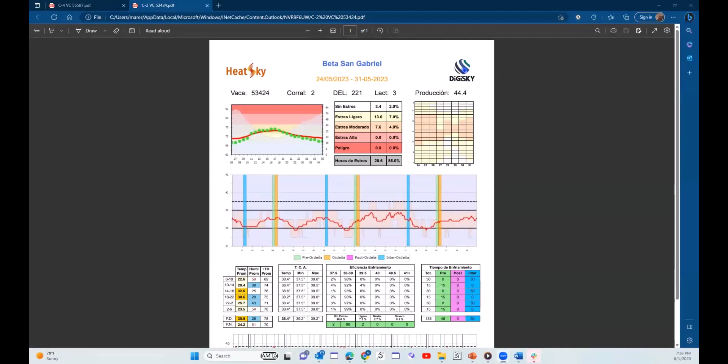Just enlarge it. Yeah, I'm not as adept with, there we go. Here we go. Perfect.

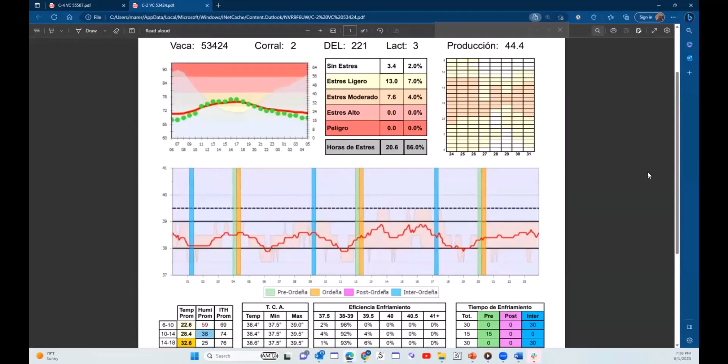Okay, so this is an example of one cow that we are cooling, okay? Dr. Martin, if you can say something, please feel free to. I will only show you two reports. The first one is these blue lines that we can see in the report. What it tells you is the moment of time that we took this cow to the cooling area. We have cooling areas here in some farms in Torreón. So they have these 30 minutes or 40 minutes of cooling.

And then the second one here is when it comes to the milking area. And also we have the sprinklers with fans. We have the box with the fans and the sprinklers. And then after a few hours, what we can see is that between 8 a.m. to 9 a.m., the heat stress starts rising. This is the body temperature of the cow, measured with a vaginal instrument that is measuring every five minutes the temperature inside the cow. So with this, we are taking decisions if we are cooling the cows in the proper way or if we need to add or reduce the amount of cooling that we are providing to the cow.

So, for example, this is the goal that we want to be always between 38 degrees to 39 degrees. That is, I think, below 100 Fahrenheit. And this is 39.5, the limit that we're accepting as a maximum internal body temperature in the animals. And what we can see here in the afternoons is that the cow, with the cooling that we are providing, is getting the proper temperature in the middle of the day. And in the night, what we can see is also it drops. But let's see what happened in the other graph. Can you please open the second report, please?